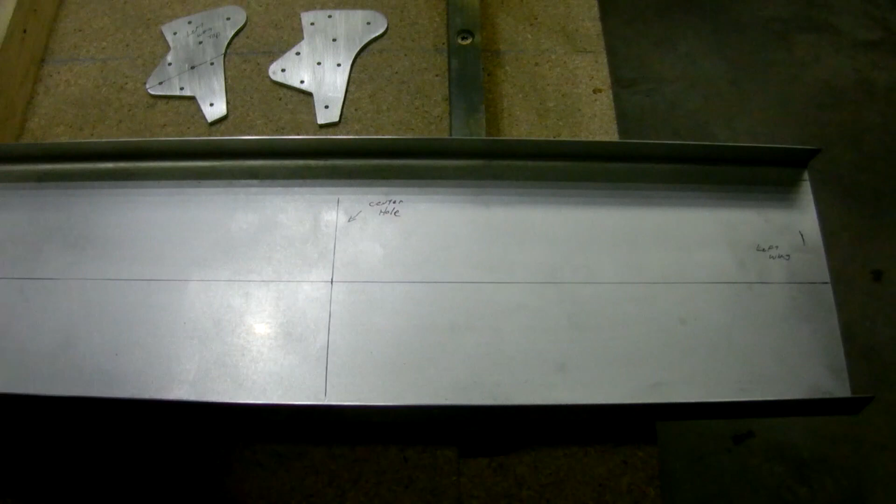I placed the cap strips in here to help reference setting this and getting the initial hole for this attachment piece. So I laid out a vertical line back here to help keep this square. This hole here should run down this center line, and then this hole should line up on the distance measurement from the splice.

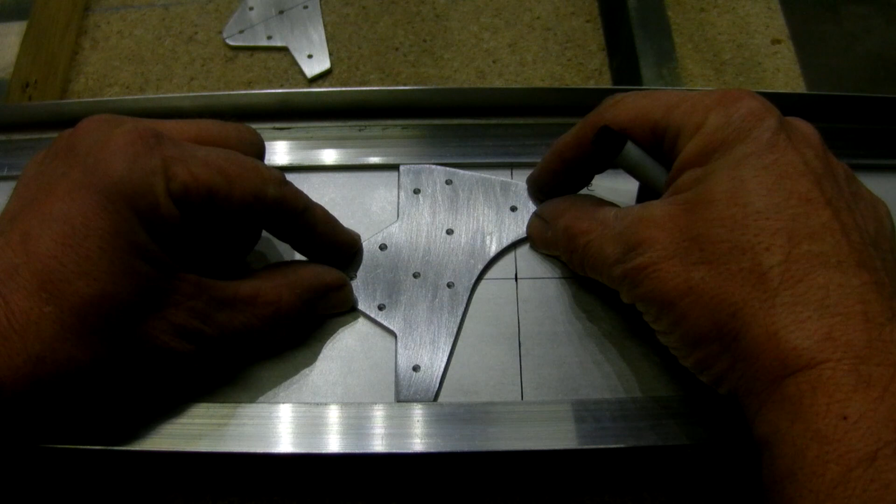So once I'm happy with that, I'll mark and drill that hole, cleco this guy in place, and then use him as a reference for everything else. If you look at the print, it's 1 1/4 inches.

Yeah, I just had to check that. 1 1/4 inches back from here is the reference point to the end of the cap strips, which is used in some places on the prints. So I'll also put that line on here before getting this all set.

Drill that hole and go to the other measurements.

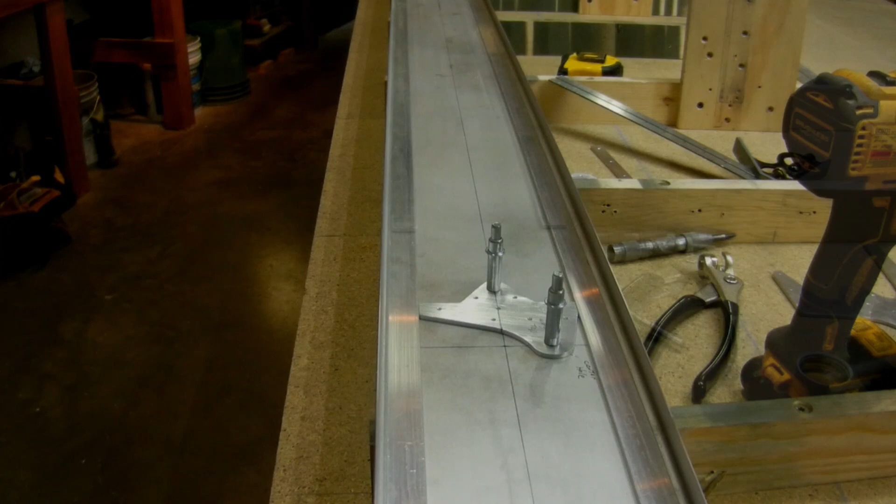Okay, I'm going to get rid of this line because it was a reference for squaring that part. You want to know what gets rid of Sharpie marks? Acetone.

Now I'm going to lay out the 1 1/4 inch reference from the center of the attachment hole, which is, per the plans, the end of the cap strips. Things are referenced from there, so having a line on here, we'll be able to measure from our line, because it's actually got a lot of curves involved and doesn't lend itself to measuring it any other way. So we'll just mark that.

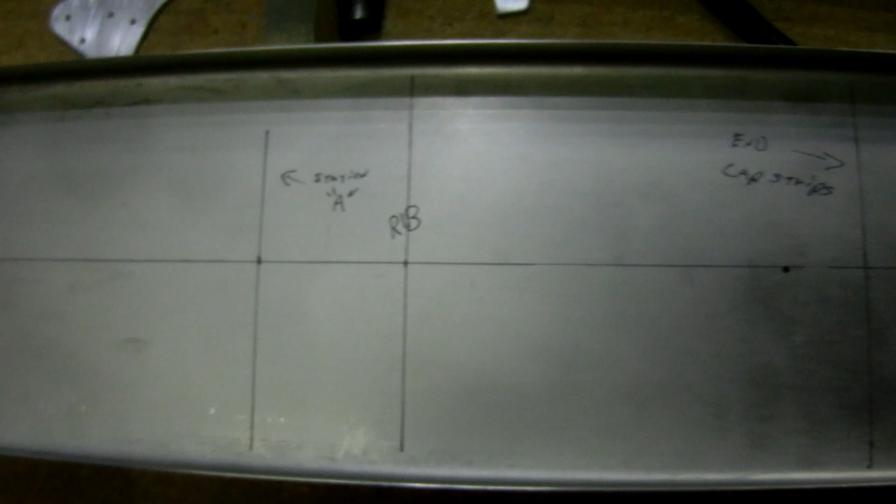I've marked out all the rib locations, all the station locations, and made sure everything matched the print. Double checked, triple checked. And now what I'll do...

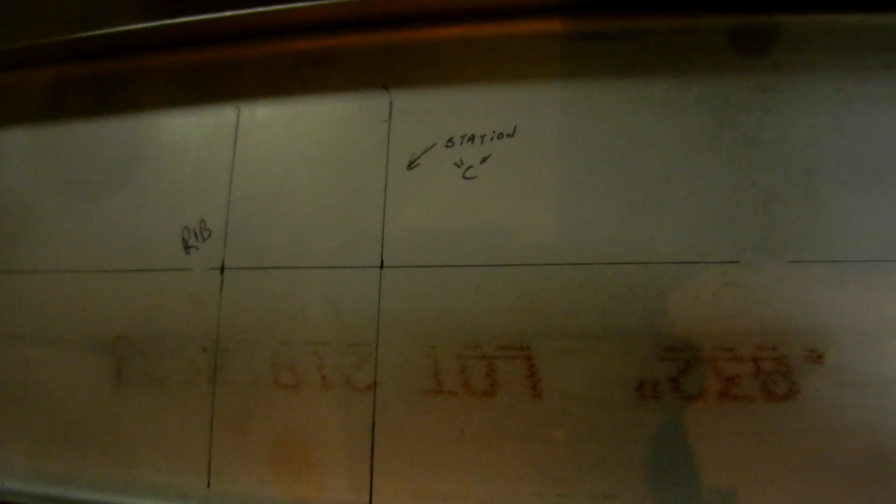...is lay the cap strips in and transfer the rib locations to the cap strips. On top of that, I'll transfer the areas where I don't want to put rivets at the stations.

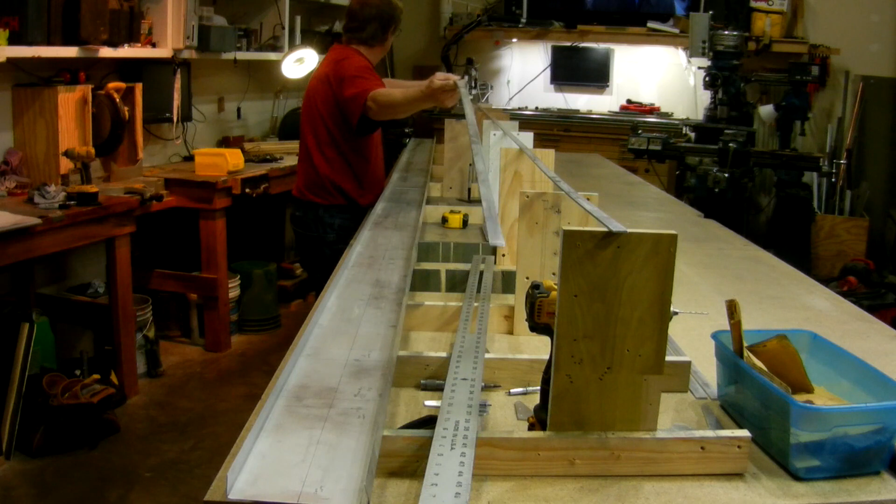I only need to do one cap strip, and then I'll lay all 4 of them together, drill them all at the same time, and all the holes will line up. It won't matter where I put them.

I'm going to trim this end of the cap strip to match the pretty corners on these end attachment pieces. So on the other end of the cap strip, where I've marked the maximum length is what I'll line up.

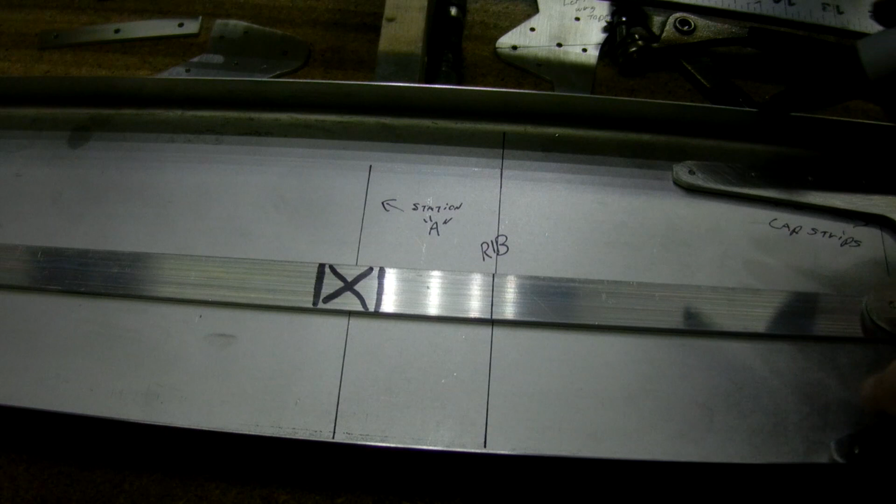So down at the end we're going to have this bracket on, and it's got quite a ways that it's going to have number 5 rivets over here. So I'm going to do the rib location here. It'll get drilled for its rivet so the attachment for the rib will have a place to sit, but we're not going to do any rivets past here.

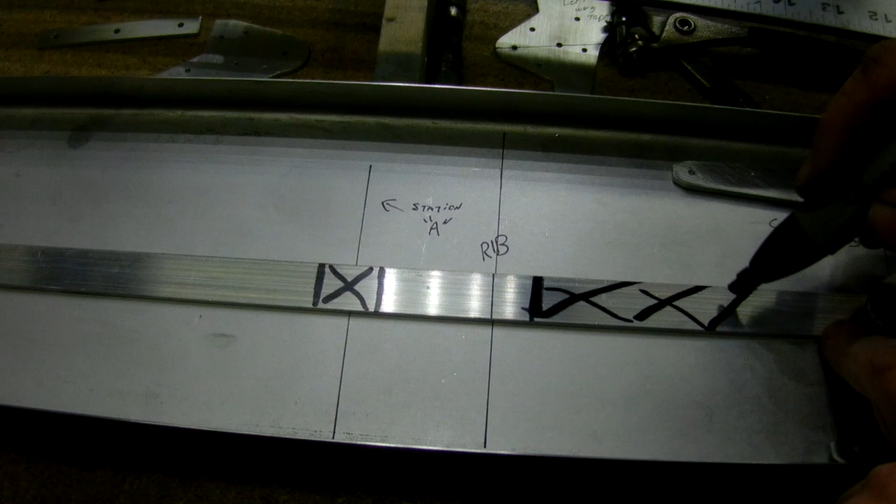So basically this whole area here, I want to mark that we're not putting any rivets in it. We'll do them after we attach the cap strips to the spar and we know where all these brackets go.

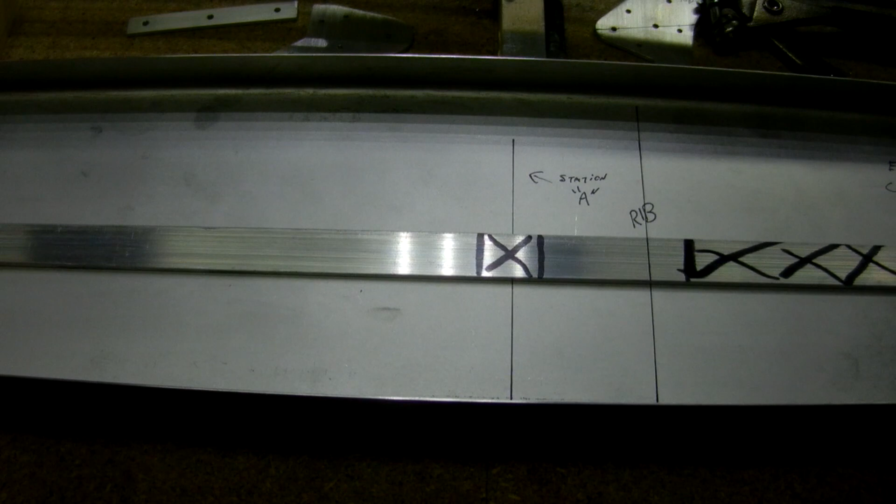Over here on station A, we know there's going to be a bolt top and bottom, so we won't put any rivets in that area. And I'll continue down the cap strip and mark out all the stations so that we don't put rivet holes where a bolt goes later.

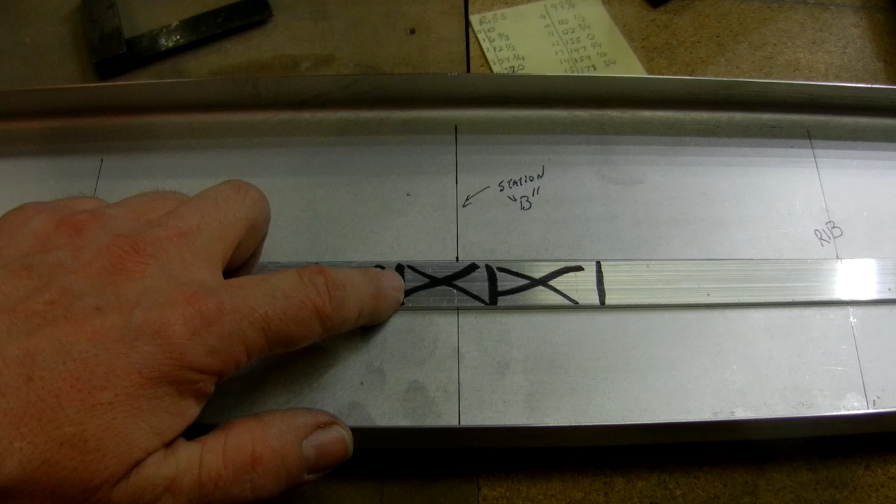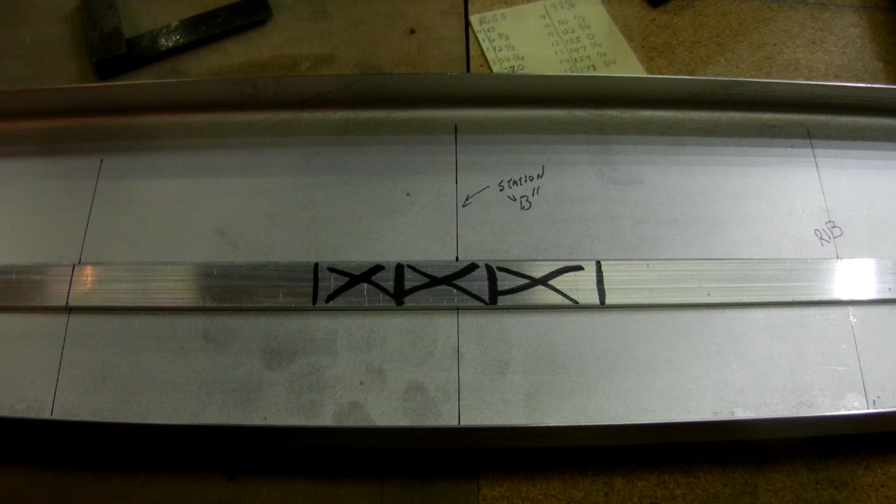I've marked out where I don't want to put holes. I've marked out where I do want to put holes. And so now I'm going to take the cap strip out of here, stack the other 3 below it, set up my drill press, and drill all the rivet holes for the cap strips that I can.